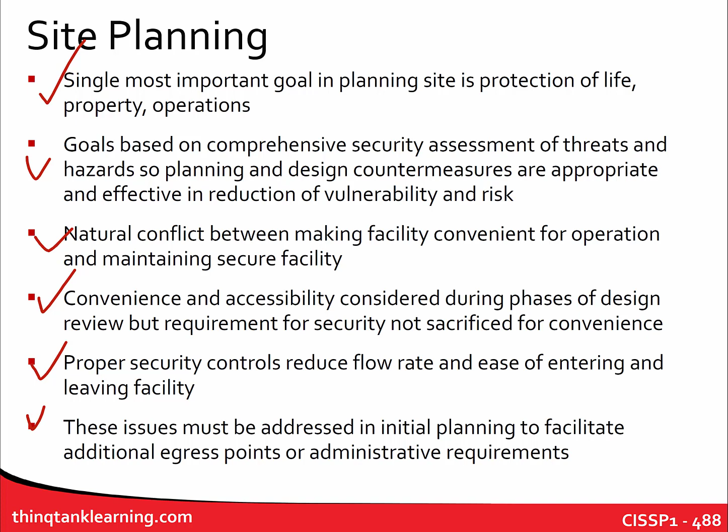Make sure that there's not a direct roadway access or perpendicular roadway access to the building, or that somebody would not be able to get up to 80 or 90 miles an hour on the roadway and still be able to access the facility, because they could break through barriers or bypass security and so on. So if it's a brand new construction, it's kind of easy to address those and to facilitate those considerations. Looking at different egress points, what the administrative requirements are for controlling those entries and exits.

I mentioned this actually, roadway design. This is not a very well written sentence, but no facility has no roadway access, right? Every facility is going to have some sort of roadway access. Now, it doesn't have to go necessarily right up to that facility, but we're going to have a parking lot. We're probably going to have a roadway to support vehicular traffic because that's how we transport each other around.

Streets are not thought of as ways to curtail unauthorized access or to prevent sabotage. Streets are generally designed with convenience in mind, reducing the amount of travel time, reducing the amount of congestion and traffic, maximizing safety, but also ensuring that the layout is efficient and so on. So like the grid system or the street system for a city or a highway system is going to be more for convenience than for security.

Maybe not the most efficient course, but designers should consider a roadway system to minimize vehicle velocity, using a roadway as a protective measure, right? That's exactly what we were just talking about. Instead of having direct access to the facility, maybe we have to go over speed bumps. Maybe we have to make various turns to get past to the gate, whatever it might be.

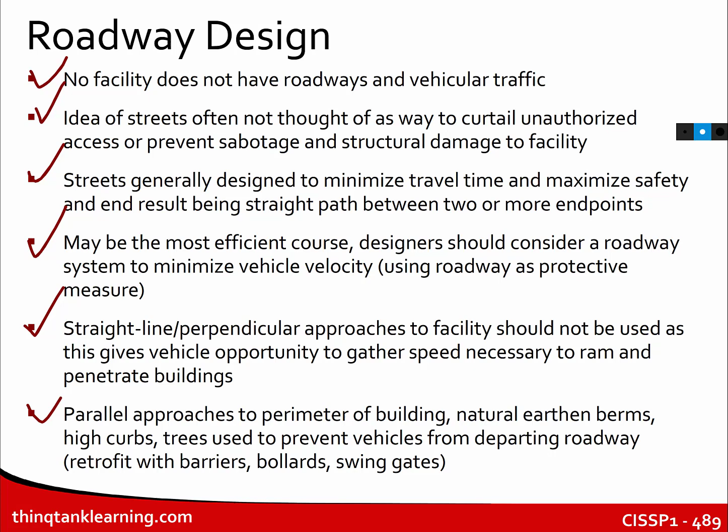It's not just having a fence. You go to the Caribbean or other places, and they're not as concerned about aesthetics. It's funny, I was in Trinidad at a facility, and it had a brick wall around it, and all they did is put some wet concrete on top of the brick wall and broke bottles and jammed shards of glass into the concrete, and that was their additional security, so somebody wouldn't climb over the wall.

I guess that's somewhat effective, unless somebody just puts a blanket over it, I suppose. But aesthetics were not a consideration in that instance. Although nowadays that might be considered art.

Anyway, crime prevention through environmental design, CPTED, is the agenda for manipulating the building and built environment, the neighborhood or the facility or whatever it might be, for safety. All right. And it encompasses many things, like natural surveillance, access control, what we call the broken window principle: if you see a high crime area, you'll see a lot of damage to property and whatnot. And that actually tends to invite more crime, right?

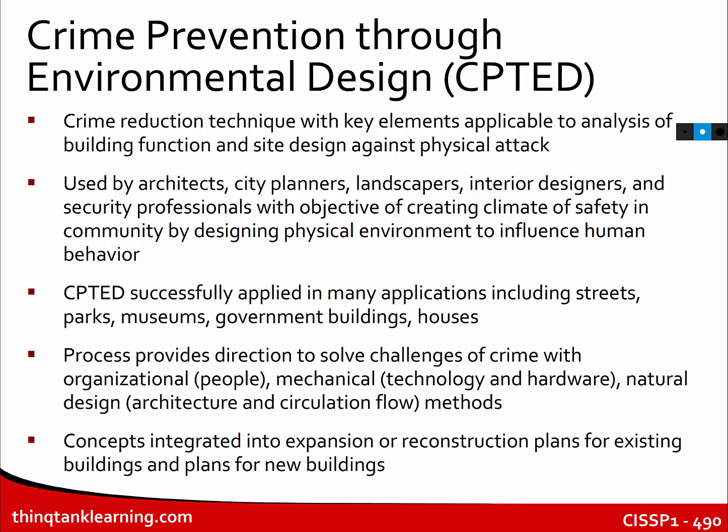Use picket fencing or some sort of fencing that is at least waist high. There are all kinds of considerations; I could go on and on, but I think you get the idea. Landscaping is important as well: trees, signage. We're going to avoid things like chain link fences and razor wire, because a chain link fence with razor wire is relatively secure, but it also gives you the idea that maybe that's the only level of protection, that there's no physical presence of personnel there to actually protect the area. So the idea is that we are using the construction of the environment to protect the environment itself. All right.

Avoid elements that create a poor image, a fortress-like appearance. Include security, but treat gates, grills, barriers as public art. Make the perimeter fences look attractive, allowing visibility through the fence, including a simple design motif, in combination with maybe a hedge of a thorny shrub, and so on.

I mentioned that previously. Use different grades of toughened or laminated glass as a design alternative instead of having bars on the window. Yes, bars on the window tend to be a little bit cheaper, and they're pretty effective, but they don't look very good. And aesthetics, at least in this country and in other countries like this country, aesthetics are a huge consideration.

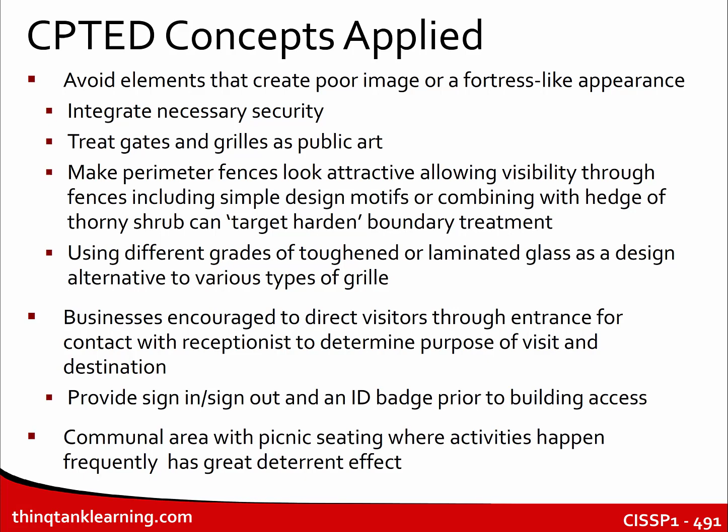Businesses are encouraged to direct visitors through the entrance for contact with an individual to determine the purpose of their visit and to authorize and authenticate them, have appropriate sign-in and sign-out procedures, ID badges. A communal area with picnic seating where activities can happen is a good deterrent as well. Why? Visibility. You have eyes on the prize, so to speak. If you have an environment where nobody is around and there aren't people that can report on incidents or potential incidents occurring, that's going to maybe encourage crime as well.

Windows are a significant part of any construction. Windows can be broken, which obviously makes them targets. Standard home installed glass windows break relatively easily. Window systems, glazing, frames, the anchorage of the windows can be used to mitigate hazardous effects of flying glass during things like damage or explosions or whatever.

But we need to integrate the features of glass into our design, right? What type of glass am I selecting? What is the height of the window? Does the window separate exposed areas from very critical areas? The windows should not be placed adjacent to doors where you can break the window and unlock the door. Laminated glass should be used in place of conventional glass with some sort of window guard, a screen or a grill. Now, that might not be aesthetically pleasing, but depending on the type of environment, it might be appropriate.

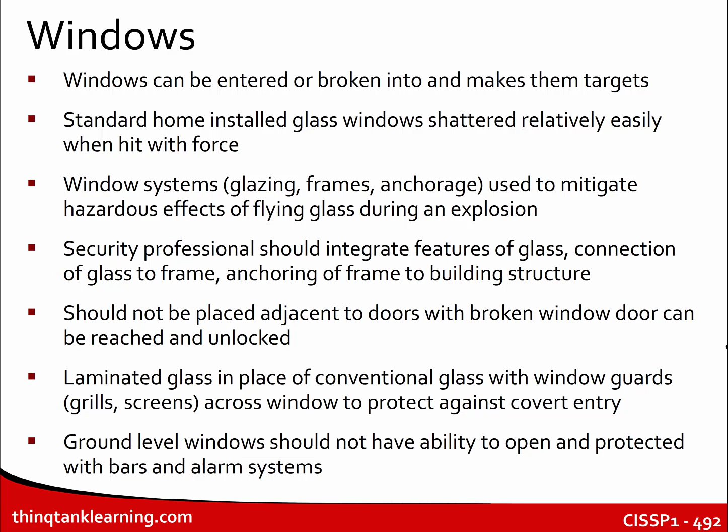Ground level windows should not have the ability to open and they should be protected with bars and/or alarm systems. There are quite a few construction techniques now that make windows very, very secure, even without bars and other grills and whatnot. So that is something to consider. But again, it is about likelihood and impact, and it's about the cost ultimately, right? The cost of implementing these things can be an issue. So what are some different types of glass?

Tempered glass is a type of safety glass. It actually has various treatments, like thermal treatments and different chemical treatments to make it strong, much stronger compared to normal glass. What actually happens is that the process of creating that glass takes the outer surface of the glass and puts it into compression, and then the inner surface of the glass is put into tension. So when the glass breaks, it shatters into very, very tiny, small chunks instead of jagged, knife-like shards of glass that your standard annealed glass might produce, right? Those granular chunks are less likely to cause injury.

There was an episode of Mythbusters where they tried to test the potential damage of different types of glass, and it was kind of interesting. And sure enough, it was the annealed glass that caused the biggest damage, right? Tempered glass is used for safety primarily, but it also has different strengths. In car windows, shower doors, aquariums, and so on, we use this type of glass. It is typically about 4 times stronger than traditional annealed glass, something to consider.

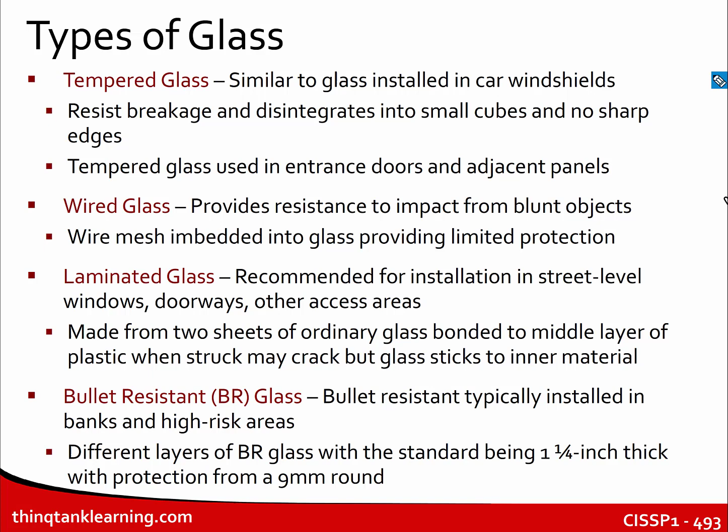Okay, and it's going to depend on the thickness of the glass laminate, the thickness of the polycarbonate that's installed in the window, or if we're using some sort of acrylic or transparent aluminum or whatever. And then, of course, there's a trade-off for that as well. As you add more and more protection, you're adding more and more weight to that glass as well. Just some pretty pictures of some glass. We see the laminated glass, the tempered glass on top, and maybe a representation of what bulletproof glass might look like.

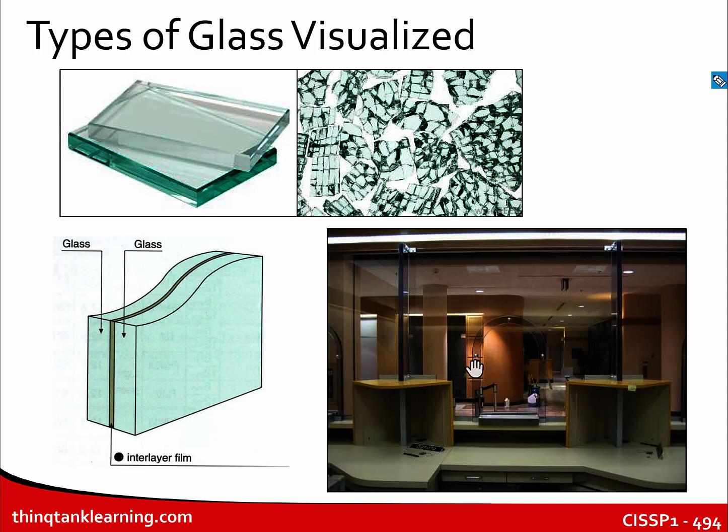You would also want sensors in place. A good intrusion detection device for buildings with glass windows and doors is to have some sort of glass break sensor. Glass as an exterior protection barrier can be easily defeated depending on the type of glass it is. Several types of glass break sensors exist. We have acoustic sensors that listen for the sound of the broken glass, and we have shock sensors that are attached to the window to feel for vibrations and shock.

Actually, the best system would be the one that incorporates both, right? The acoustic and the shock. Dual technology is what that's referred to as. Dual alarm systems prevent false positives. Both acoustic and shock sensors would have to be activated before an alarm was triggered. Relatively inexpensive compared to everything else. And so implementing both would not be too much of an issue.

It is a nominal component price of the overall installed cost, but it can provide a lot of benefit. It's not a preventative mechanism necessarily. It could be a deterrent. You see a bunch of sensors on a window that can't be defeated by the foil of a stick of gum.

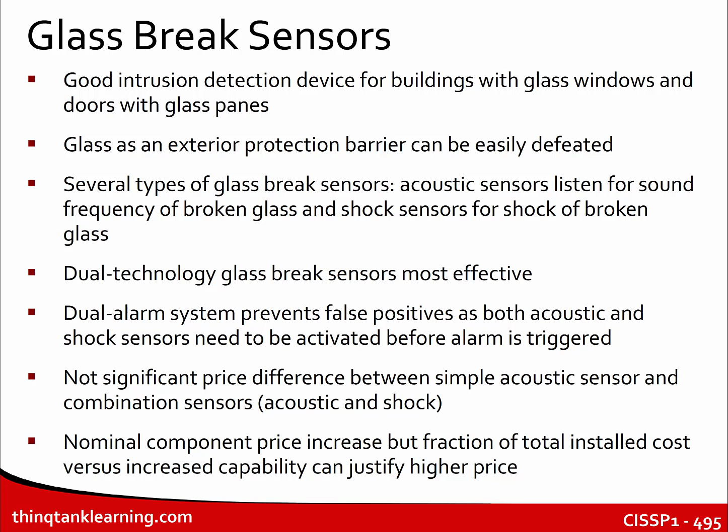That can be a deterrent. All right. But it also can be a detective control. Natural location threats, something else to consider. The physical location of the facility. Are you going to be susceptible to earthquakes, floods, hurricanes, tornadoes, etc.? We have to prepare for those natural disasters.

We have to have an adequate communication system and communication plan in place, keeping in mind that traditional communication mechanisms might not be available during the disaster. The way we communicate over cell phone or desk phone or whatnot simply might not be available. So we have to have backup communication plans.

Information and periodic training exercises, fire drills, earthquake preparedness drills, whatnot, should be done as well. So for people, it becomes kind of muscle memory, right? We're not having to think coherently in the face of a natural disaster. We're just simply reacting based on our training.

Organizations can reduce the impact of disasters by implementing flood proofing, installing emergency power systems, securing items that could shake loose during an earthquake or whatnot. All right? And we all know the natural disasters that we might face. Hurricanes, tornadoes, earthquakes, fires, mudslides, etc.

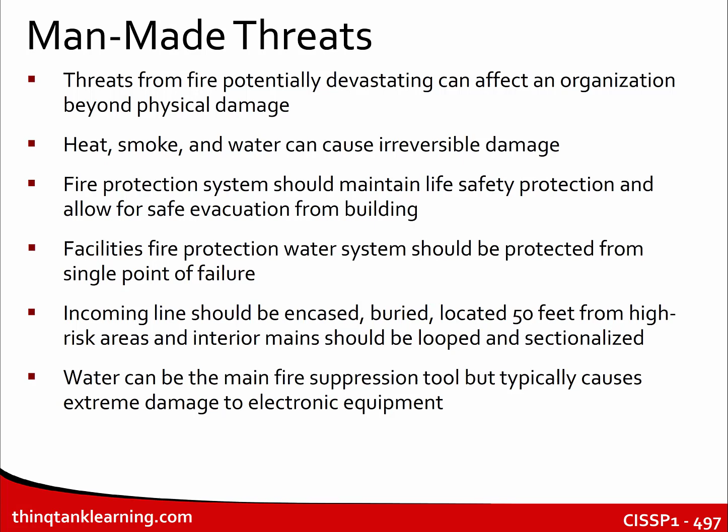Sectionalized means that damage to one section of the water system would not prevent other sections of the water system from functioning. Water can be the main fire suppression tool, but typically causes extreme damage, especially to electronic equipment. Yeah, no doubt. In data centers and whatnot, we don't tend to have traditional fire suppression systems.

So fire extinguishers. In the past, they used to love to talk about Class A and Class B fire extinguishers, and what the difference was. But we still mention it as part of the discussion of what we do in class here. But honestly, I'm not sure that you really need to know what the different classes are. There are actually up to Class F in this case.

A Class A fire extinguisher, and different countries have different ways of identifying. In most cases, fire extinguishers are going to be identified by some sort of color band or some sort of color sticker or something to indicate what its purpose is. In the United States, we do use colors, but we also use shapes and letters. So Class A is a triangle. You don't need to know that for the test, but that's for kind of ordinary solid combustibles.

The mnemonic that you can use to remember that is A is for ash, right? ASH, just to be clear. Ash, so that would be wood that's burning or whatnot. And then there's a numerical rating for that fire extinguisher to indicate how much water it holds and the amount of fire that it can extinguish. The geometric symbol is a triangle, and the color is green.

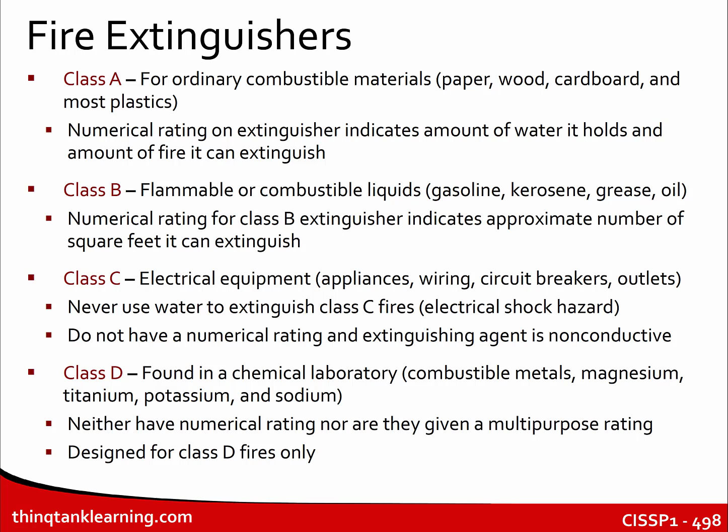It's interesting. My son's school had a carnival this last weekend on the school grounds where they had bouncers, and they actually had full-size carnival rides like a teacup ride and swing ride and stuff like that. But because it was outdoors and kind of a pop-up type of thing, there were a lot of generators running. So the fire marshal was on site walking around and required that every generator had a fire extinguisher next to it. So they had to run around and find fire extinguishers, but they had to be appropriate fire extinguishers for that type of environment. Okay.

We'll talk about dry chemical extinguishing agents a little bit later on in this section. Utility concerns. Security dealing with the electrical systems to guarantee essential power to the facility is important. Emergency and normal electrical panels, conduits, and switchgear need to be installed separately, as far apart as possible. Electrical distribution systems should run from separate locations. Emergency generators should be located away from loading docks, entrances and parking lots. You don't want somebody running into your generator.

You should have secure locations like the roof. Grades and interior areas should be protected. The main fuel storage for the generators should be located away from loading docks, roadways, entrances, parking lots, and of course the fuel itself needs to be protected from tampering, which surprisingly enough is not something that a lot of people take into account.

This hotel that I'm at teaching this class has a generator, and I just happened to be walking by it, and I checked, and there's no security. I can open up the generator doors. I can get access to the spark plugs of the engine, and the fuel cell for the generator just has a twist-on cap with no lock. Maybe the likelihood is low that somebody's going to mess with that generator, but it's just something to consider. All right.

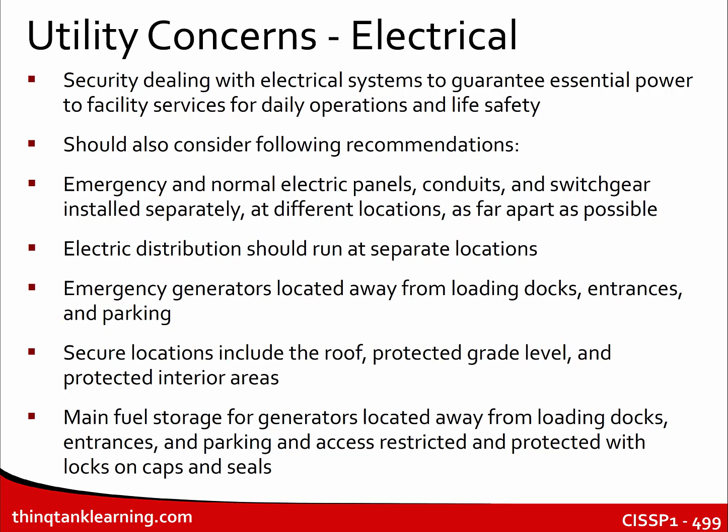Comms security is important as well. Communication is obviously an integral part of any facility. Primary telephone service, maybe PSTN, traditional POTS lines, PRI or a T1, or voice over IP. Or maybe we have multiple types of communication. So we're running a voice over IP solution, which ultimately is probably going to run over some sort of physical connection for data. But we might have backup POTS lines. POTS are plain old telephone system.

Employees should be provided telephones, mobile devices, or radios, especially if they are in charge of emergency response and part of the communication plan. Base radio communication systems with repeaters need to be installed as well. And those base radio systems are typically going to be operated by guards or by management personnel and so on if there's some sort of breach in security or some emergency that we have to respond to.

A lot of things we could talk about in this section here that's relatable to comms security, but for example, the MPOE, which we'll talk about in the last section here, our facility point of entry. Is that area secure? Because if you're using traditional PSTN components, it would be very easy to take a butt set and tap into conversations and listen to conversations and so on.